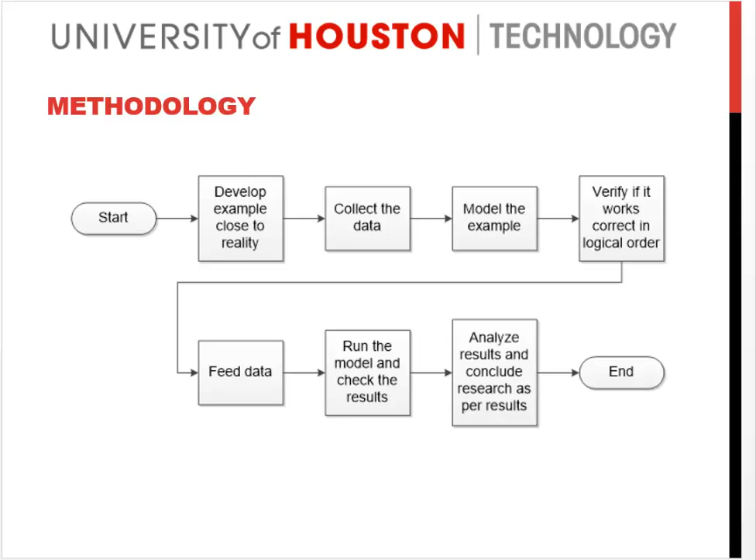We have input the data into the model and verified relevance of outputs. We then analyzed the results and concluded if simulations can be used in look-ahead schedules for predicting the schedule at a good confidence level. I'll quickly introduce the example problem before we look into the model.

We have modeled an imaginary hotel project with several suites that are very similar. Each wall, as you see here, each wall of the room is represented by room number and geographical location of the wall. So for example, this wall right here can be called north wall at room 1, north wall at room 2, etc.

Similarly, east wall at room 1, east wall at room 2, etc. So we have three types of work to be finished in each room: one is the finishing job, two is electrical, and three is plumbing. As you can see, the plumbing job is not there at every wall, and electrical is also not there at every wall, whereas the finishing job is there at every wall. So in logical order, the plumber should go first, then the electrical, and then the finisher. That's the logical order they should follow in the model.

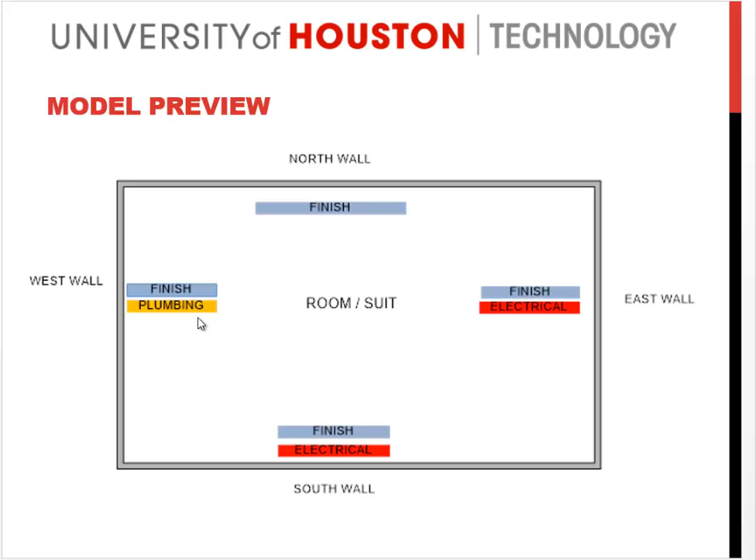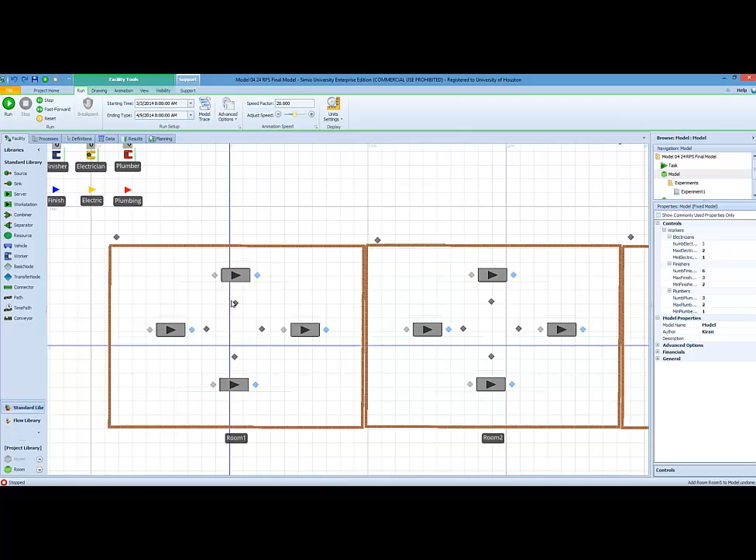Thank you. Welcome to the model. Here is the first view of how the model looks, with 4 rooms as explained in the PowerPoint presentation, and each room having a workstation at their respective wall. Each wall is represented by room number and the geographical side of the wall. Like here, this is called north wall at room 1.

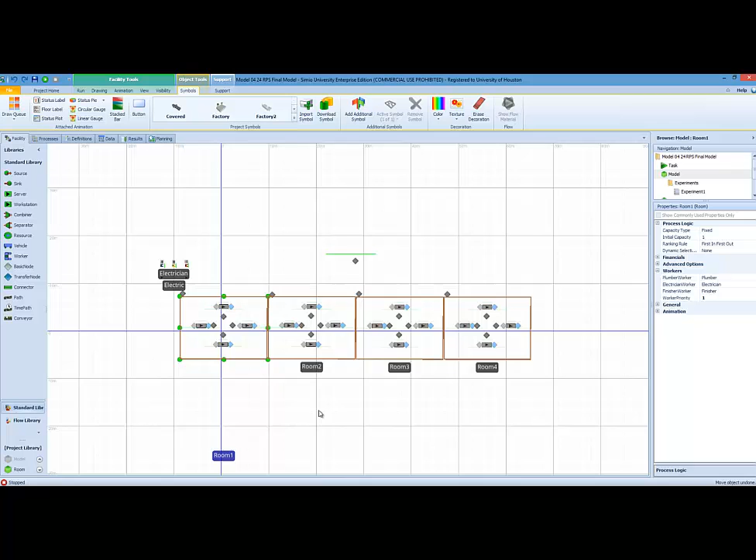Similarly, if we click on any of the other walls, this is south wall at room 2. That's how it is represented, and these rooms are free to move in space anywhere. So these are not bounded to the architectural plan as they should be. But since this is a data-driven model, we are not more concerned about how it looks and where it is positioned.

As we can see, there are 3 persons placed here. Let's switch to 3D view so that they are better visible.

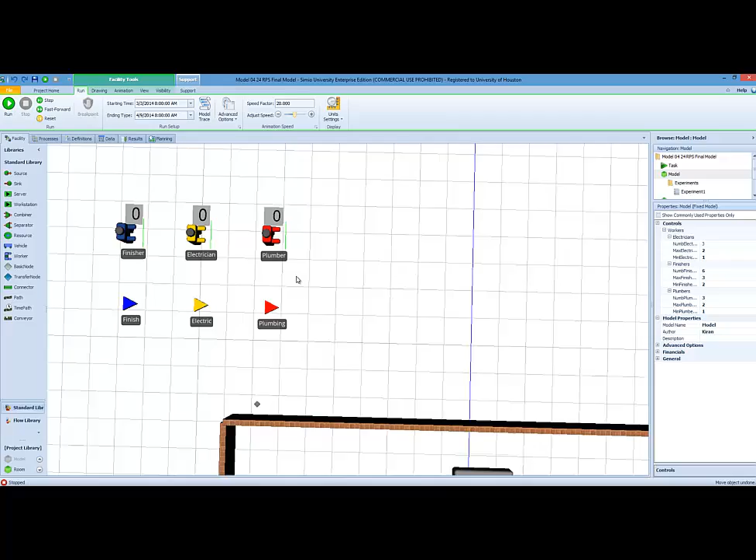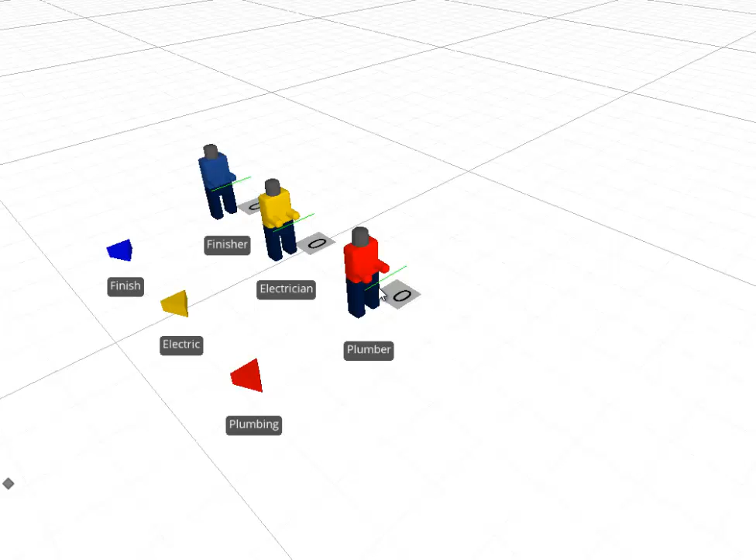So here there are 3 people who will be performing the work we needed: plumbing, electrical, and finishing. We have color coded them with matching colors so that each work package represented should be done by the same person in the same color. Let's switch back to 2D view.

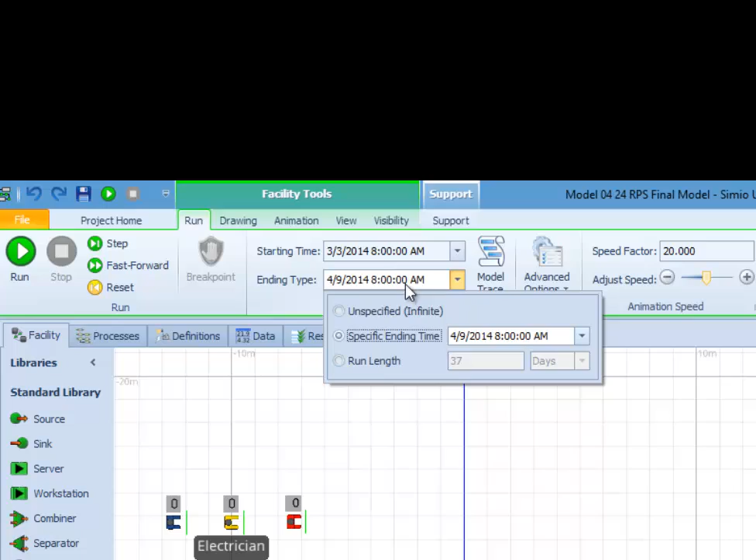So the model pretty much does everything on its own once we give the data. We can choose when to start the model and when to stop. Right now I have chosen 37 days. I'll tell you the reason for that later.

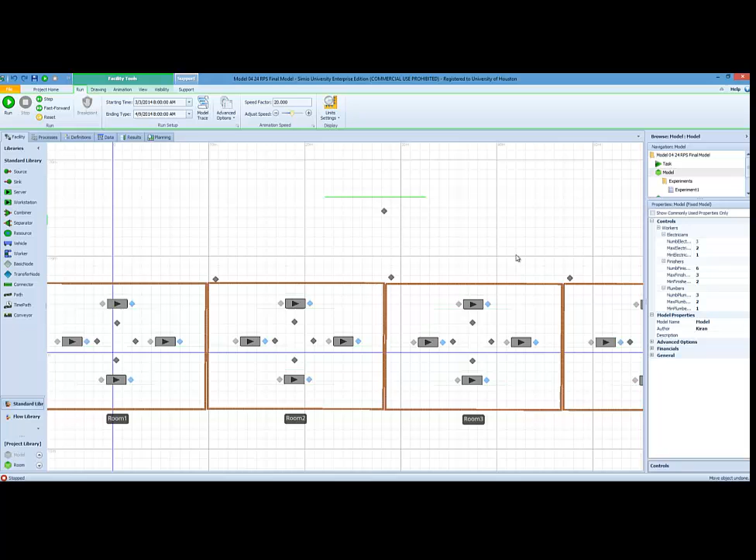We wanted the model to be intelligent enough to form its own teams, because in construction practice there is no standard team size. Supposing there are 4 finishers in one team, there can be 3 finishers in another. In this project we assume the framing phase is all completed. It's the roughing phase where the electrician has to come in and do his work, the plumber has to come in and do his work, and then the finisher comes after all of them to close the wall with sheetrock. So to accommodate these changes in team sizes, we have given...

...the supervisor a facility where he can just give the number of people he has available here. So it says electricians, finishers, and plumbers. For electricians, how many does he have, how many can be in the maximum team size, and how many should be in the minimum team size. Similarly for finishers and plumbers.

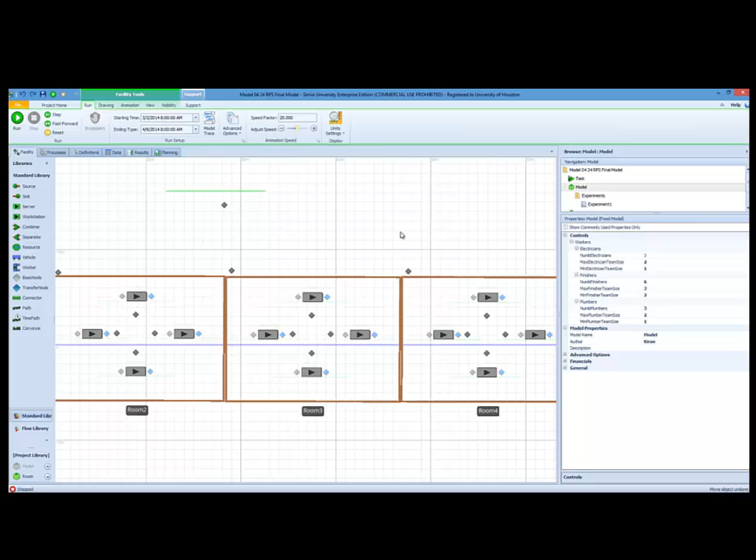This is done purposefully so that we don't have to feed in the number of teams always and collect, which becomes more problematic for the supervisor. So the model is intelligent enough to form its own teams once we give the number. We can change the number here very easily, 4 or 2 or any of these can be done. Right now I would like to leave the number as is. Overall it gives the flexibility for the modeler, the supervisor, or the project manager to change numbers and play with the model.

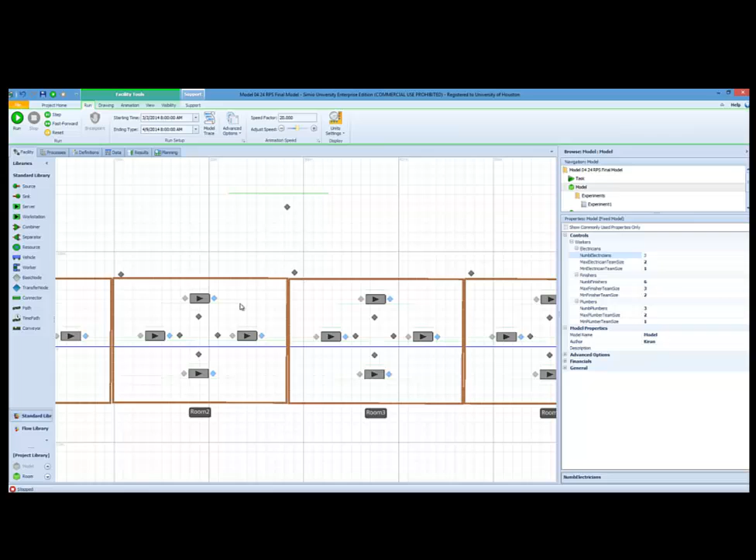Similarly, here is a 3D view of how the rooms look, and since in 3D view it is better visible, I would like to hit the run button and see what happens.

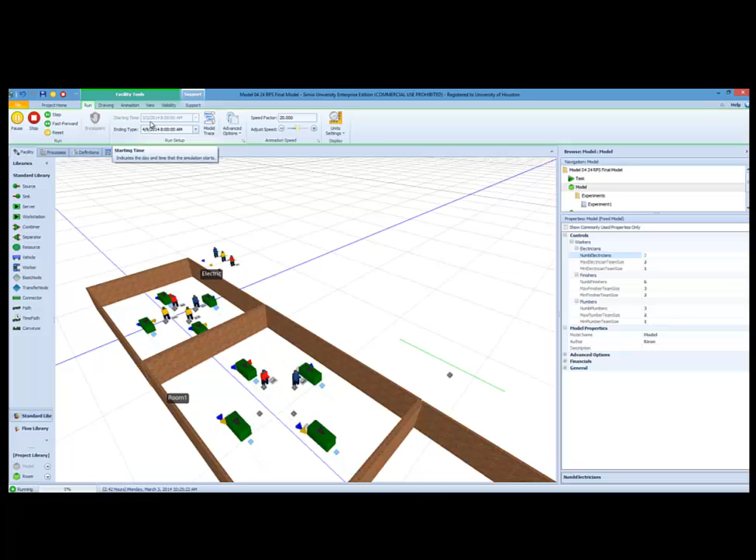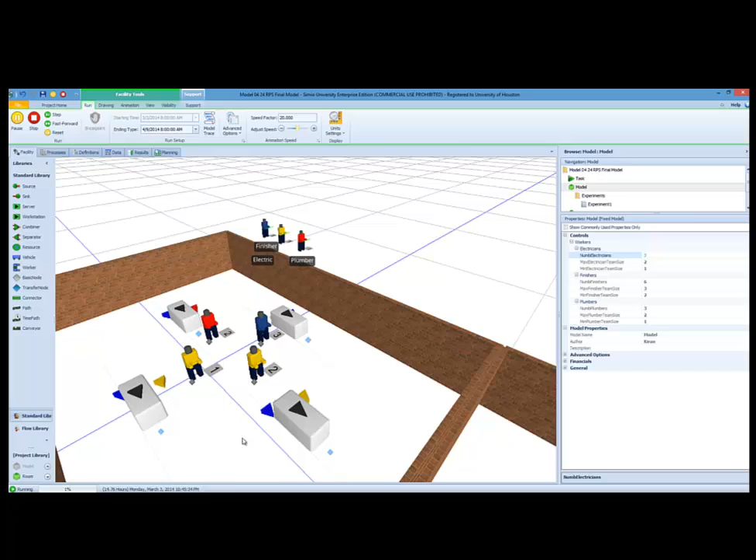Once we hit the run button, immediately, since we started the work at 8 a.m. in the morning on March 3rd, we can see that all people go to their respective work zones, like shown here. The finisher with a team of 3, this one person represents 3 people here, and this one electrician represents 2 people. This electrician is single, this plumber is 2 people in the team. So they go to the respective work zones and start working on it.

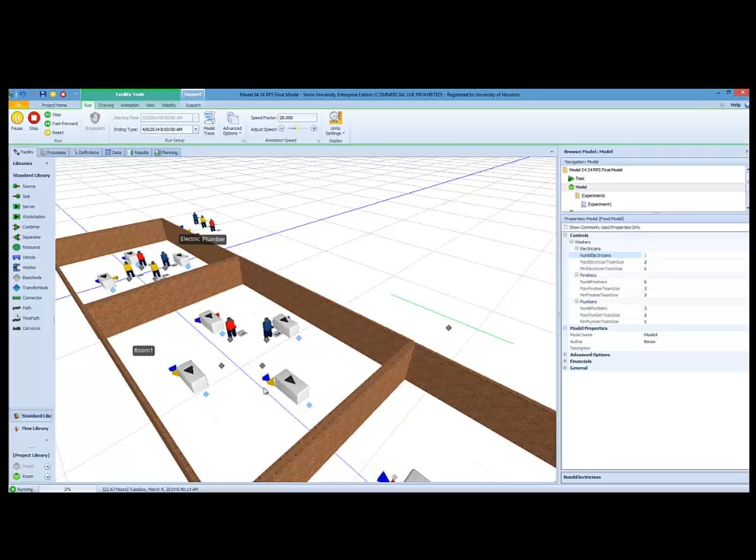There are more teams available, so they move into the next room available, going on a priority. If you see in rooms 3 and 4, there is no one working. That means after finishing their job here, they go to rooms 3 and 4. If we add a 5th room, it will be the same. We see that people are moving from one room to the other. Once the electrician finished in room 1, the electricians come to room 2.

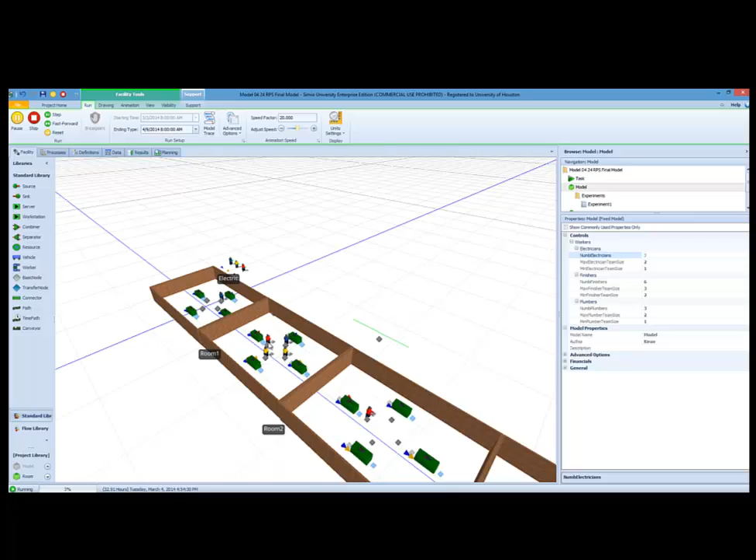Similarly, now we can see the plumber moving in room 3, since there is a plumber already in room 2, I'm sorry. Let's pause the model for a second and see. At this point we can see how many people are working and at what time. Here it shows the time clearly: March 4th, that's the second day.

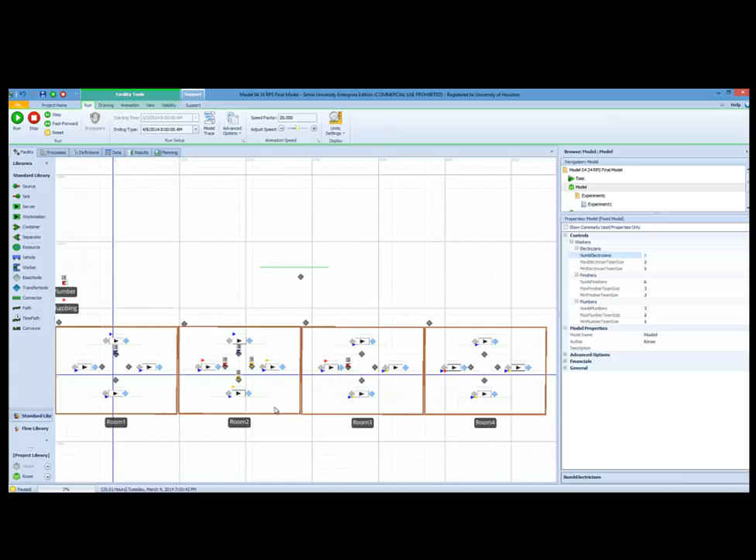So that's the visual animation, and the animation can be done in a much more detailed way, like the colors can be changed. There are a lot more things we can do in the animation, but this project doesn't focus more on visuals, it focuses more on data.

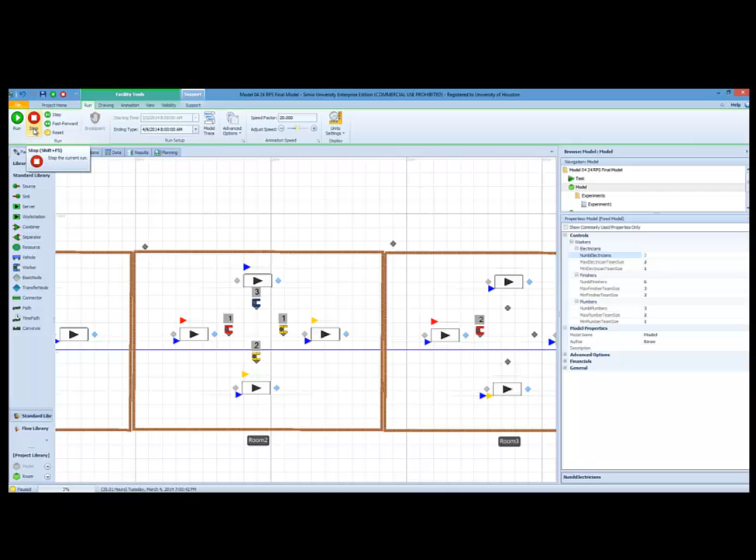So let's dive into the data. Let me stop the model for a while. We have given work performance data for each work package, so depending on that, they perform work on each wall.

Supposing for the finish, we can see here we have used a random triangular distribution, and we said it takes 18 to 24 hours, the pessimistic and optimistic timings, and 20 hours is the most likely time the work can be finished. Similarly, we have also included the team efficiency factor, which is if there are 3 members in the team, their performance is different compared to 4 members in the team. So that's what we have included, and we have done a separate data table for that.

Let me walk you through into that table. So we have team efficiency tables here for electrician, for plumber, and for finisher, these tables. Let's go back to the facility view.

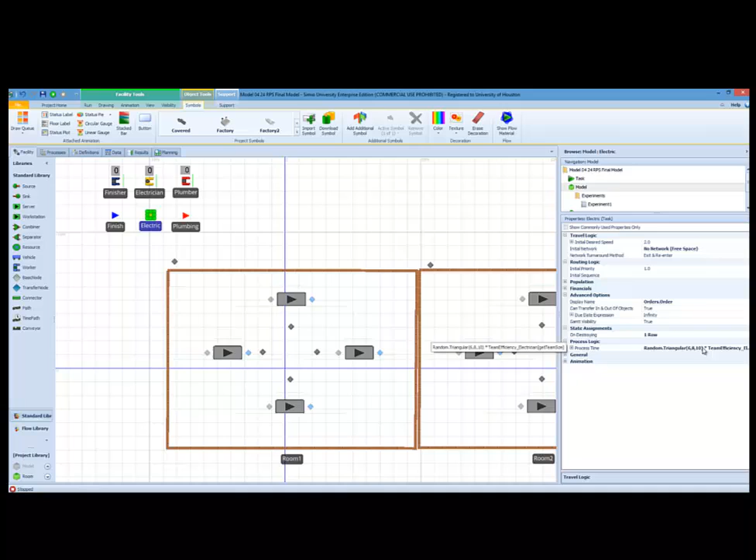Now similarly for electric work, it takes so and so time in pessimistic, optimistic, and most likely time, including the team efficiencies. So these are the factors considered for work performance in the model.

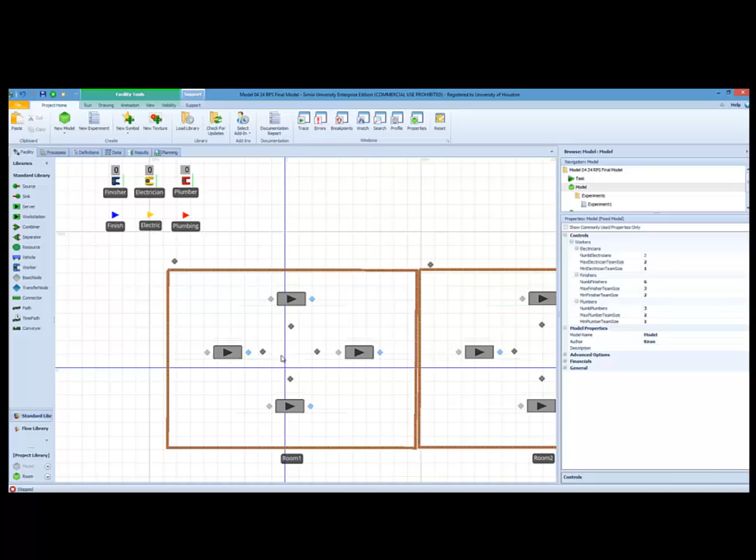Supposing this wall is larger in quantity than this wall, so this wall takes more time than the east wall or the west wall. So typically south and north walls take more time than east and west walls, and that is accounted into the area here for the finishers.

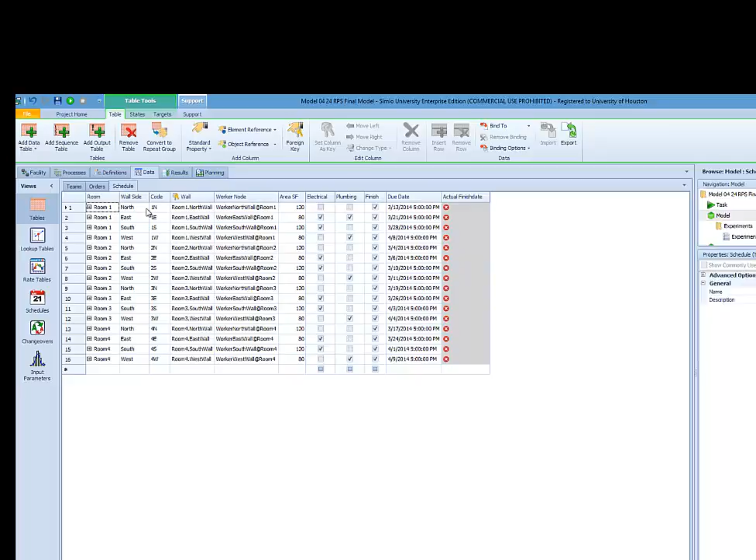So it calculates the area square footage, which we have already given in the data table in schedule, which shows the north wall in room 1 is 120 square feet, the east wall in room 1 is 80 square feet, and so on similarly. So the model runs through that table and calculates the surface area, and performs the work.

We have electrician, finisher, plumber, 3 teams, and each of them have their respective work to be finished, which we can see here when we click on that.

Let's switch to the data table where we can see all the data we have fed into the model. So we have electrician, finisher, and plumber. These are the teams. We can add more team members if it is required. Types of work depends on the types of work that are done for that particular week.

In the orders table, we can see this is the detailed list of all the tasks to be finished from room 1, all 4 walls finished, room 1 2 electrical walls, and room 1 plumbing. So all 7 tasks are combined, and we have given a particular deadline for each of them to be completed.

These deadlines or the due dates are derived from Microsoft Project after we put in the same information that we are putting into this model, but those were more deterministic. However, this due date acts as a good starting point for us to see how we will be able to finish, and this status here shows whether we will be on time or late.

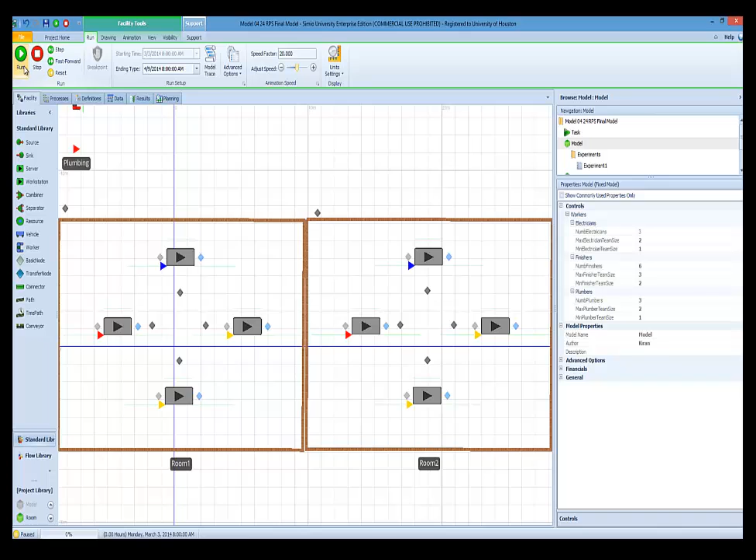So now we have already seen how the animation looks like, one after the other. The workers go from one wall to the other. So now let's fast forward this.

So that we can see the data table. Now we can see all the statuses that came on time, whatever is late, and some of them are on time and some of them are no value. No value means we have given only 37 days, and 9th of April as the deadline for this simulation running, the period of running.

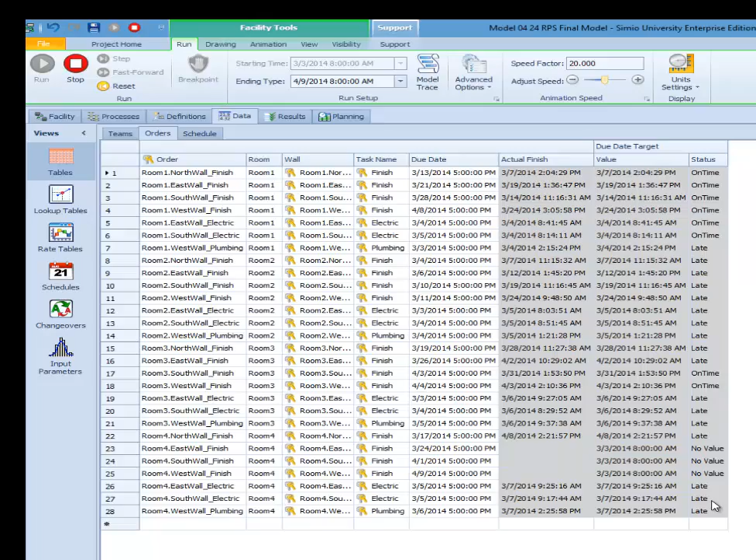This is because the Microsoft project gave the last deadline due date as the 9th of April. That's why we said we will run up to 3 or 4 weeks and see what happens. So this is approximately a 5-week schedule, where we can see that most of the work is late. This will definitely help the project manager decide if they have fewer workers, if they have to add more people, or if they have to do something else.

But there are more features that the project manager can use. Let's go into the planning tab. Since we have been changing the model, it asks me to reset it. So I will reset and stop the model, and here we have the entity workflow, we have the resource plan, and logs and tables, which are all different ways of understanding the problem.

So let's go to entity flow and do the create plan. It says to display the Gantt chart, click create plan. So now, it goes very fast. With just one click I can get the entire Gantt chart here, and it shows me which worker is working at what time and where he is.

So this gap in between is Saturday and Sunday, the weekend. Remember, our work schedule is standard Monday to Friday, so Saturday and Sunday they're not working. That's how it is showing here.

And it also shows the constraints. When there is a plus sign, when you click on that, it shows what it was constrained by. This particular task was constrained by the electrician. It says room 2 east wall electric work was constrained by the electrician for 1 day, approximately, because the electrician was busy in another room. Similarly, electrician 1 and 2 were occupied in the other room, so there was no electrician here. That's how it suffered - it was a wait.

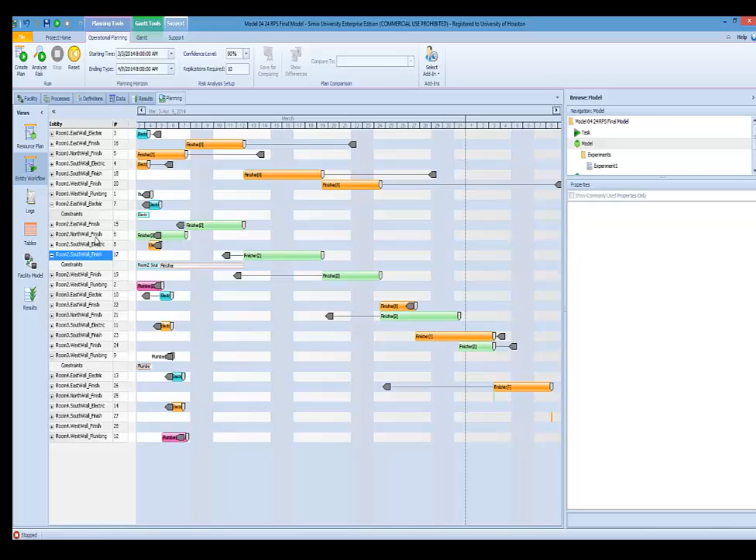Go ahead and look into the resource plan. The resource plan is another useful tool for any project manager to check how things stand.

See, it shows us right away the constraints, entities, room 3, room 4, room 2 east wall electrical. You remember this, we have talked about this before. So all these, from a different perspective, show us we have two electrician teams and where they are at what time and what they were doing in the project.

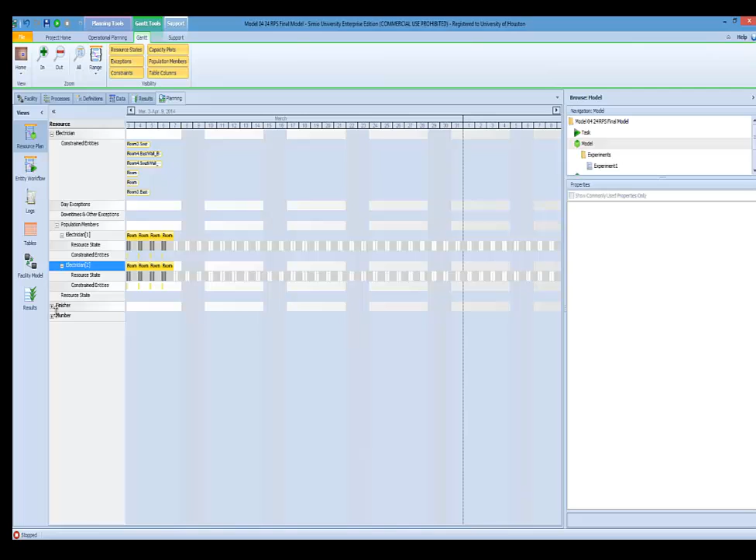So at any given point we can see the finisher is occupied for the longest time and has constraints on the finisher - there are two teams of finishers. Similarly with the plumber, the plumber is less constrained compared to the finisher or electrician, so we may not need to increase the number of plumbers. So that's the more detailed input we get from the resource plan.

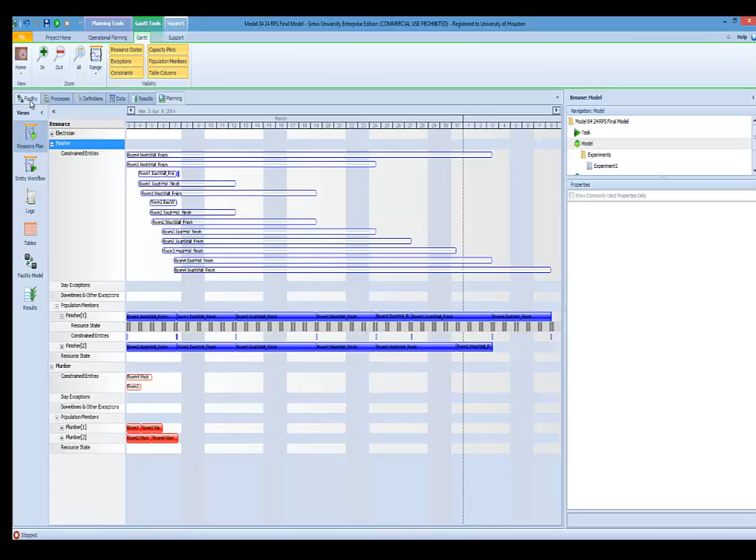So let's minimize and go back to the facility view and change a few numbers here. Let's say we want to double the electricians. Also we want to double the finishers because we were constrained by finishers a lot, and we will say we need only 5 guys here.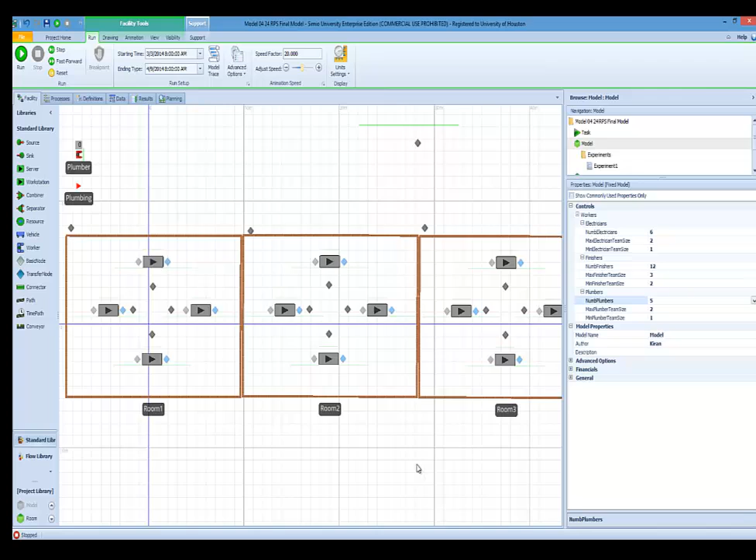So let's reset the model, but remember, when we reset, all the finish dates and everything goes back. So if you want to save them, we should have done it before. However, we know there were more lates and very few on time. So now let's see how the model turns out.

Now let's fast forward without waiting for a long time. Now it quickly gives us results, and now you see there are more on-time works and much less late work comparatively to before. We can see which work is getting late and by how much. So that's another decision project managers can make - if they have to fast track, and how much money they lose to get it on schedule, or if it's better to let it go late.

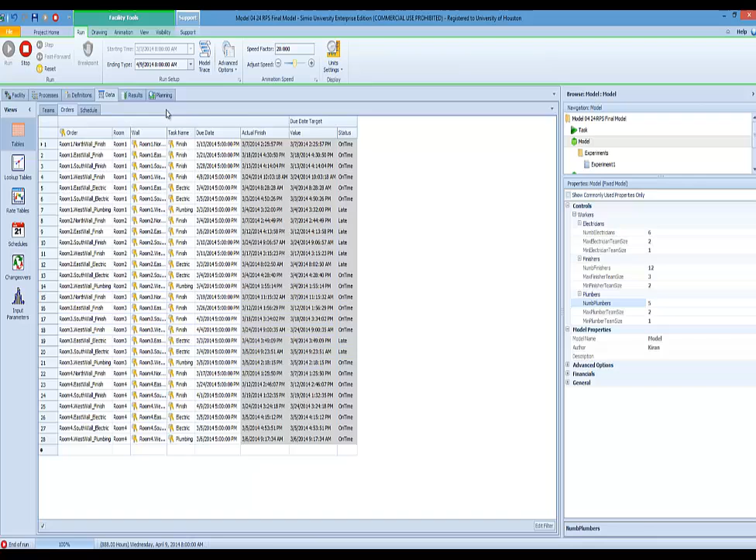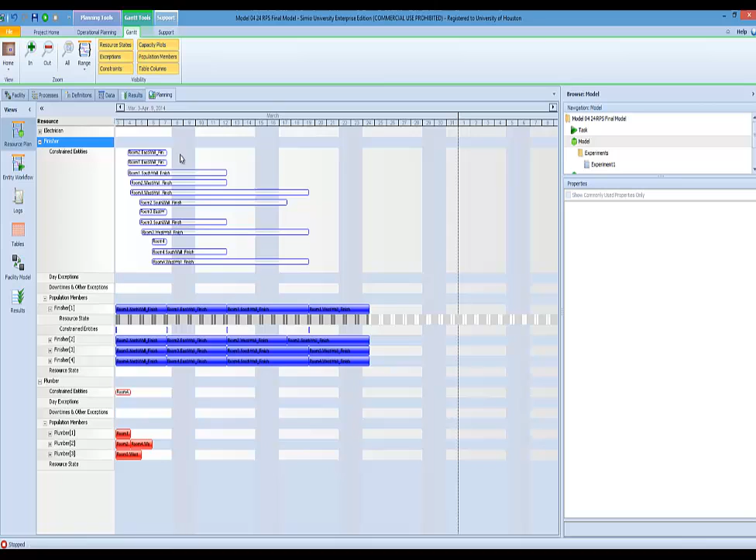But however, there is another important and interesting feature of this software, which is analyzing the risk.

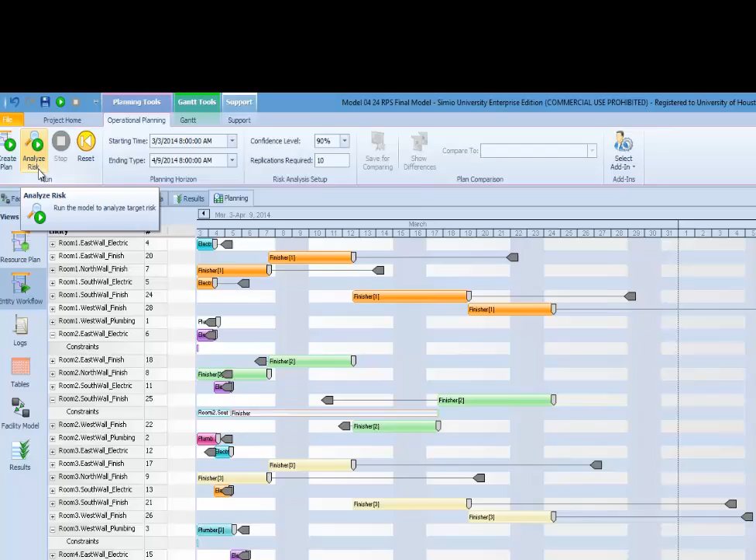So now when we go here, there is another tab called Analyze Risk. We can have as many as 10 replications, 20 replications, or however many we want when we analyze risk. Let's see what happens when we click on Analyze.

Boom. The model quickly gave me the probability of these tasks reaching on time. I have set a confidence level of 90%, so anything closer to 90%, which the model considers to be achieved, is shown in white. Anything in the danger zone is shown in red, and anything in yellow is very close to achievement, but not quite.

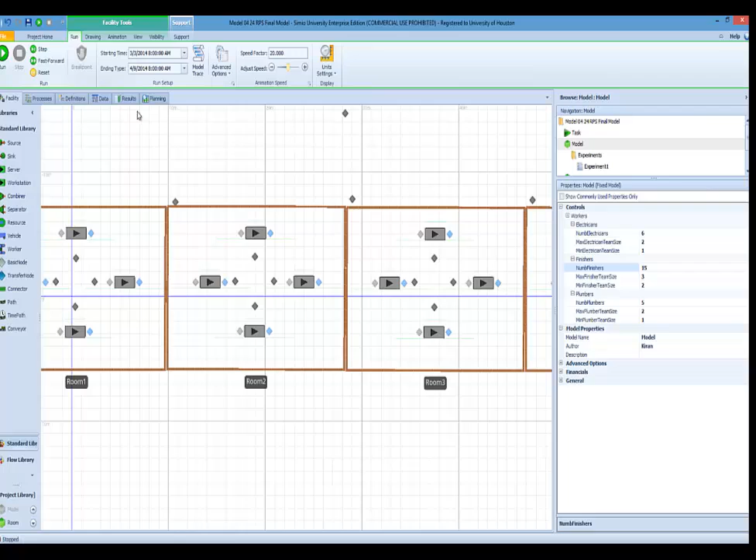This is a good sign to see how confident we are in achieving our targets. We can change the numbers quickly and see how the model changes. So we can reset and go back to the model, change the number here, maybe to 15 people, and go back to the planning stage to create the plan and analyze risk.

It did make a little difference, but not too much. The number of yellow zones have reduced, and I believe one or two red zones have also reduced, and the percentages have increased. Similarly, we can control the performance classification we need for this project.

Let's say we can do this, so that means anything in that zone is red, anything in this zone is yellow. That's how they're counted. And let's say anything we want to increase, everything else becomes adjusted - that's the confidence level we can control here.

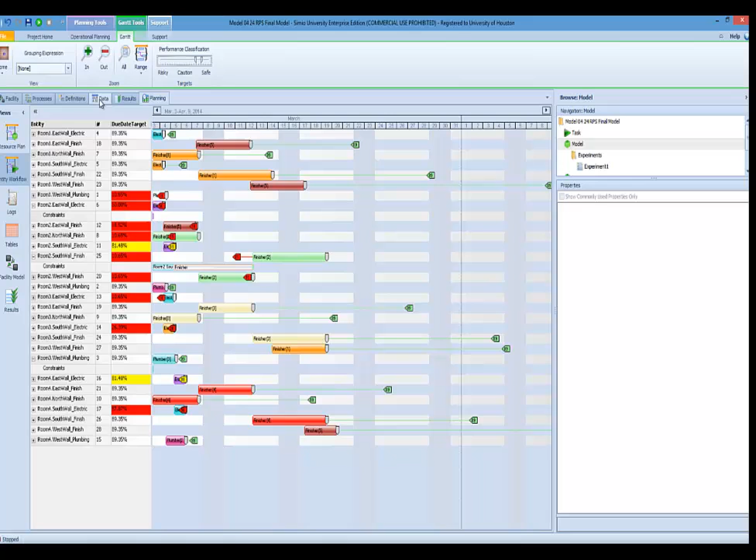So it depends on how confident we want our model to be. I think this is a pretty good start for any research to proceed further and incorporate this concept into real projects. The way we should be doing it is, when we start the model, we start with a few standards on how much time the work performance takes, and what the work efficiency will be.

In the first week, we start with standard data and collect data throughout the week. When we feed the model with accurate data at the end of the first week, that means we'll have pretty accurate forecasts for future weeks. If we continue to iterate this process every week, by the end of the second or third week we'll have pretty accurate measurements and a forecasting system for the look-ahead schedule.

Supposing we consider this project starting on 3rd of March. Let's say we collect performance data from 3rd to 7th of March - how quickly the electrician is able to perform, how quickly the finisher is able to perform, how quickly the plumber is able to perform with two members in the team versus one member, and similarly for finisher and electrician with different team sizes.

When we put the exact data into the model, it spits out accurate results very quickly, and the project manager can take quick decisions if he needs to add more people or reduce people, or if he's overspending.

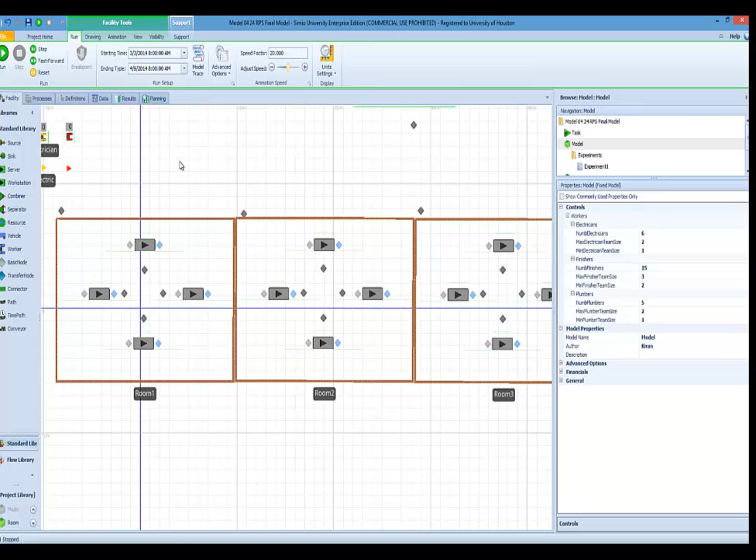I believe introducing simulation modeling into look-ahead scheduling is one of the best ways to control the master schedule in a project. This software also has many other features like handling materials, handling financials, and so on, which I'm not touching at this point, but it has a lot of future potential.